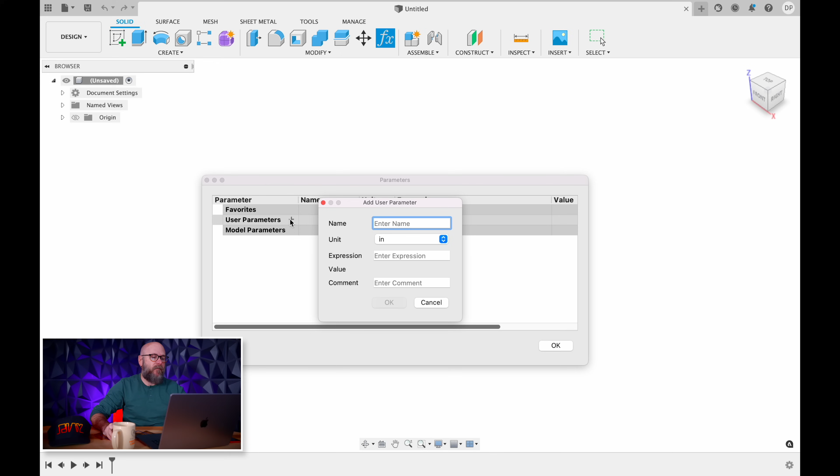So let's bring the computer over here and get started. First thing I want to do here in Fusion 360 is drop some parameters. So we're going to hit our parameter button, and first one we're going to do is width. Let's say we want the width to be 5 inches. We can change this later on.

Hit OK. Then we're going to do another one for height, and for now let's say that is 1 inch. And then we need to do a wall thickness, and let's say that's a 1/2 inch. Again, we can change all of these later if we want to. And then one more for number of sides. That one does not need a unit. And for now we'll say 5.

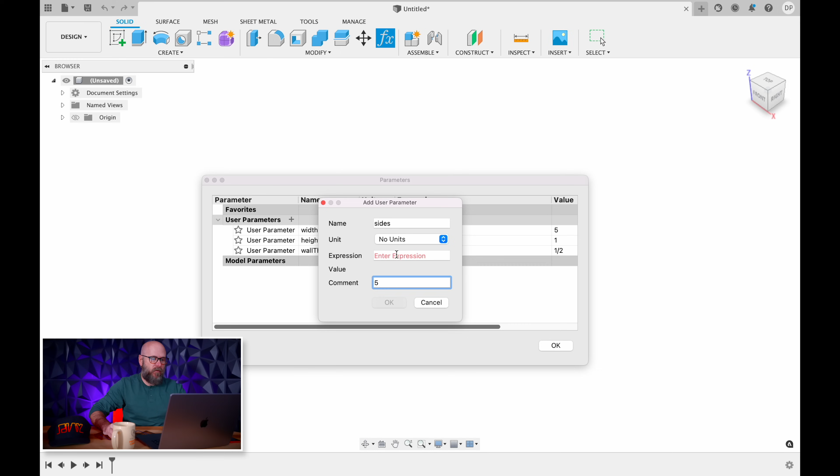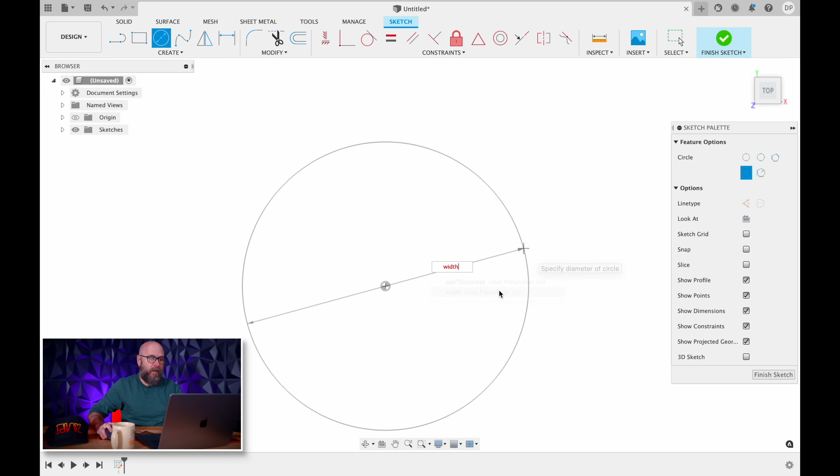Hit OK. Now we need to create a sketch, and we're going to select this plane right here. We're going to create a polygon, and you would think, oh, I would just use the polygon tool here in Fusion 360. The problem with that tool is you can't change the number of sides later down the road. So to get around that, we're actually going to create a circle and just draw a portion of that pie. We'll draw a circle here, and the width is going to be our parameter that we set earlier. So we'll just hit width for that.

And now we need to draw a triangle in that circle. So I'm going to hit L for line, and just any size triangle that you want. And then we'll connect those two lines. Now we'll hit D for dimension. We're going to select this line and this line, and then type in 360, which is the degrees of a circle, divided by the number of sides. We set that variable in our parameters, and that is going to change it to 72 degrees.

I need to extend this triangle out a little bit for our outside wall. So I'm going to hit L for line, come out here, from here to here, and then connect those two. Then I'm going to use the parallel constraint and make these two lines parallel. Then I'll hit D for dimension, select these two, and give that a dimension of wall thickness. There we go. So now we have 1 of 5 sides, and within that I want to create a pocket that we're going to cut out.

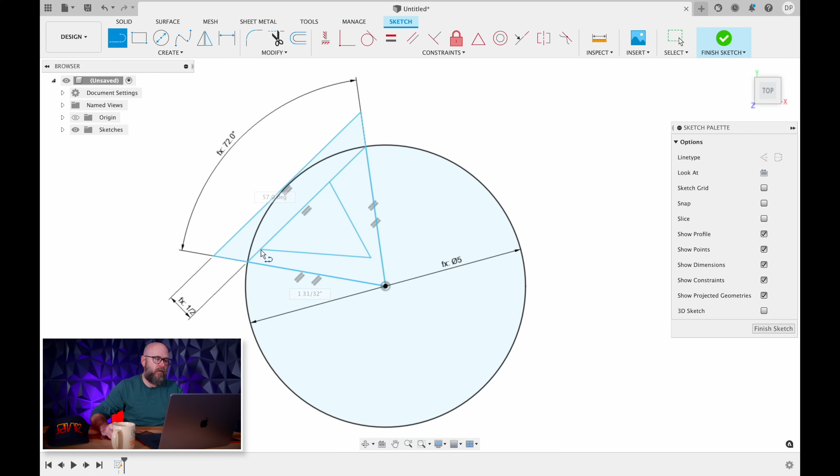So now we're going to draw one more triangle using the line tool, and just randomly pick a couple of points. Then I can use our parallel constraint to make these two lines parallel, and then these two lines parallel, and then hit D for dimension, and dimension those two to wall thickness, but half, so divided by 2. And then again for these two, wall thickness divided by 2.

I want to round over these corners so they are not so sharp, so I'm going to create a fillet between this one and this one, and I want that fillet to be 1/8 of an inch.

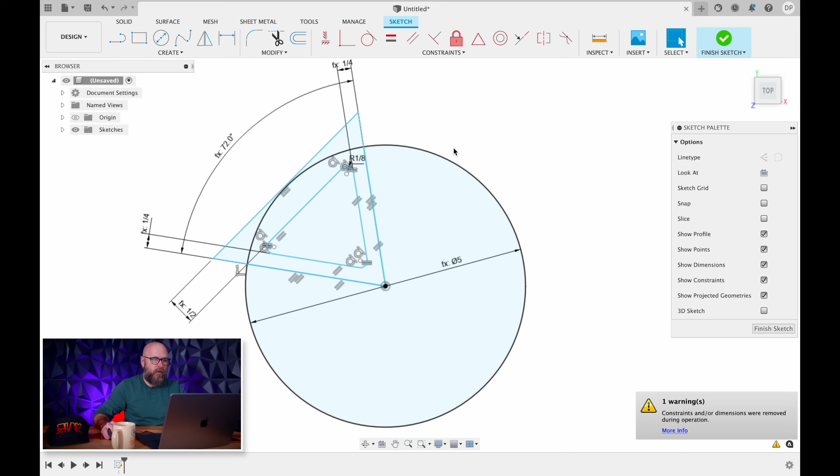Now I'm going to make our circle a construction line, so I'll hit X for that. Everything is connected and looking good.

I want to select this and select this. I'm gonna hit E for extrude, and go down, negative height, and hit enter.

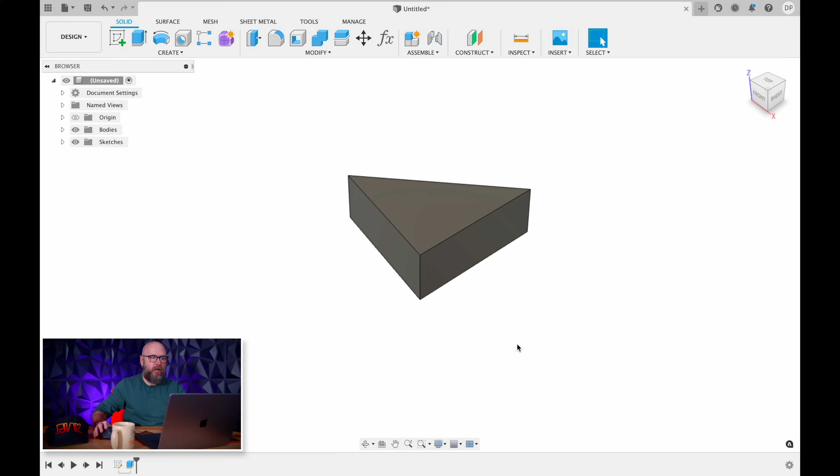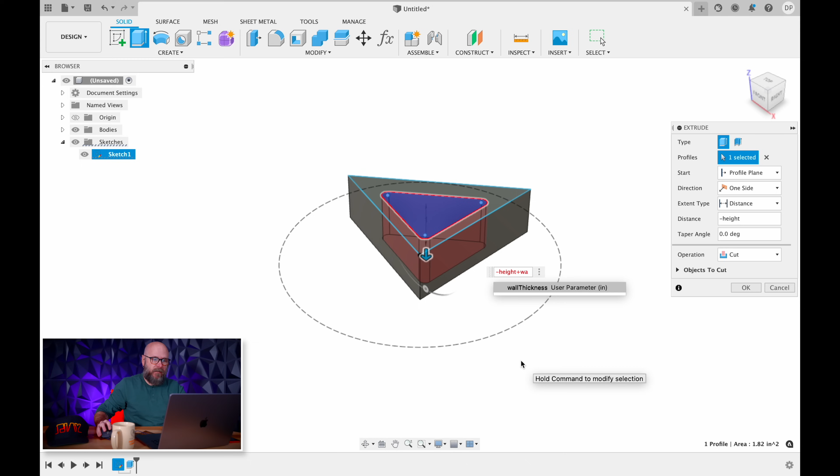There we go. I'm gonna turn this sketch back on so I can see it, select that, and now extrude and pull down, negative height, but that would go all the way through. So I'm gonna add our wall thickness. Click on that, hit OK.

Now I can create a pattern, so I'm gonna go circular pattern, select that body, and have it rotate around that right there. We can choose our number of sides. It defaulted to 5, which is the number we want, but we want to be able to change that in the future.

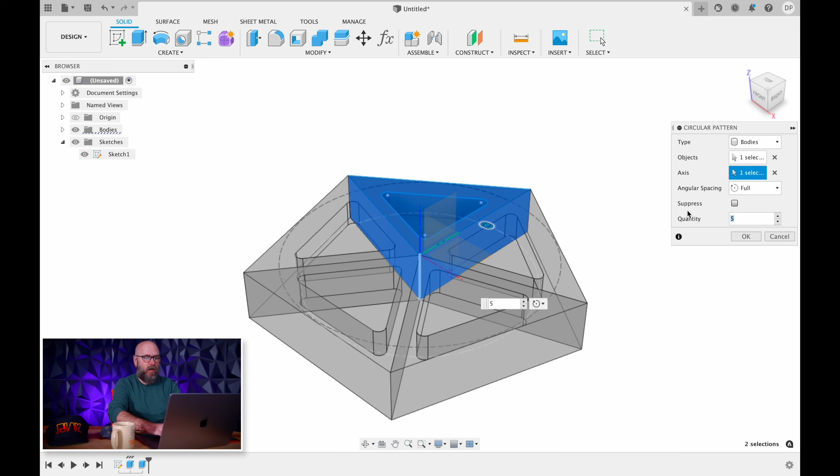So we're going to change that to our parameter of sides. We'll hit OK. This is actually not the number of sides and the size that I want, and this is the really cool thing about Fusion 360.

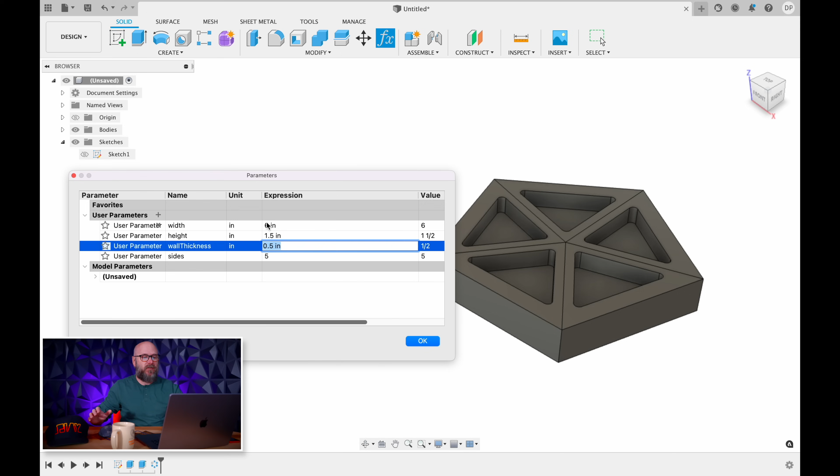If I go back into our parameters here, I want the width to be 6 inches, and it automatically updates that. I want the height to be 1.5 inches, and it updates that too. The wall thickness is too thick, so we're going to go 0.25. That is looking much better.

And we can change this number of sides to anything now. We could make it 12 sides, and look at that, but we actually want it to be 6 sides. There we go.

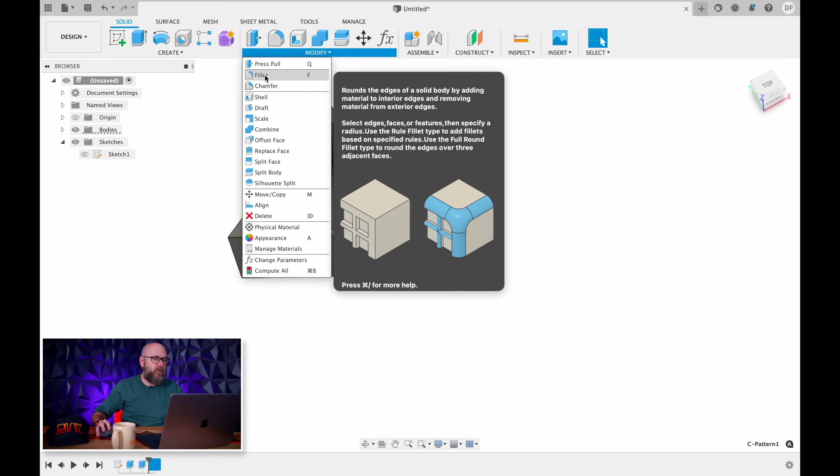This is not ready. There's a couple things I want to change. I want to create a rounded bottom, so if I go back to before I made that pattern, I can choose the fillet tool, select that line, and make it whatever I want. I know I want it to be 0.25.

And then if I move this back over to past where we made a pattern, it updates all of them. I like the wall thickness for the inside, but I don't like the wall thickness for the outside. I want that to be a little bit beefier.

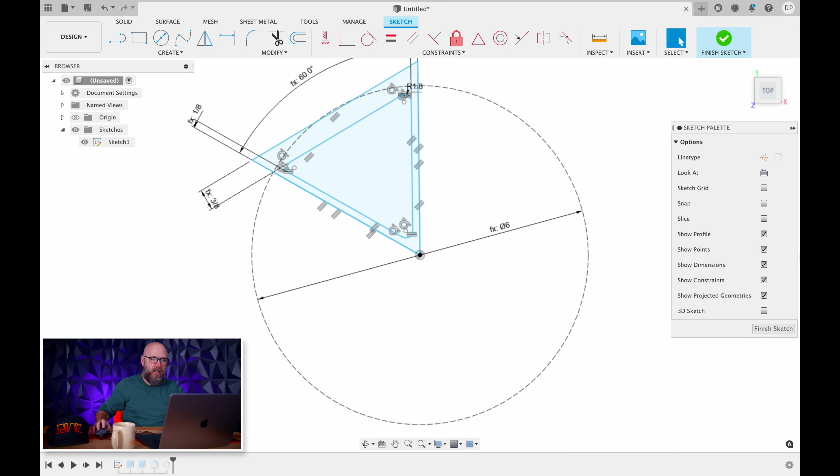So I can go back and edit our sketch, and change this to wall thickness times 1.5, and that updates the sketch. If I hit finish sketch, it updates the whole thing. This is looking much better.

One last thing I need to do is create a lip so it can hold a lid here. I am going to go back to before we created that pattern, and I want to create a sketch on that guy right there.

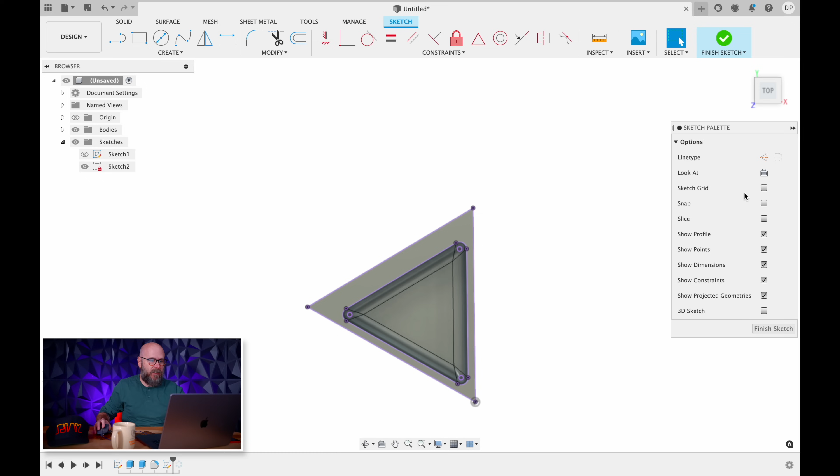Now I need to project all of those lines up onto the sketch as a template here. I'm gonna hit L for line, and draw a line here, draw a line here, and then connect all of that.

I need to make a parallel constraint between this line, and then I'm gonna hit D for dimension, and dimension that to wall thickness times 0.75. I like that.

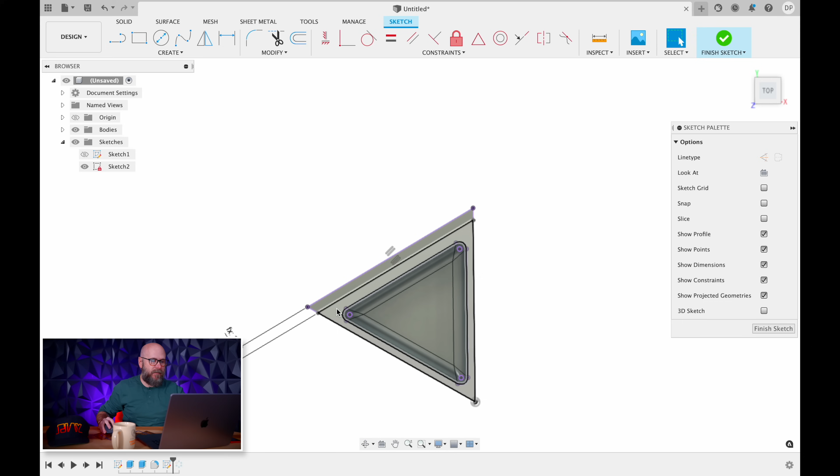So now I'm gonna select this, hit E for extrude, and pull that down so it cuts away 3/16 — whoops, we gotta go negative 3/16. We'll hit OK, and then I can move this playhead to past our pattern, and look at that.

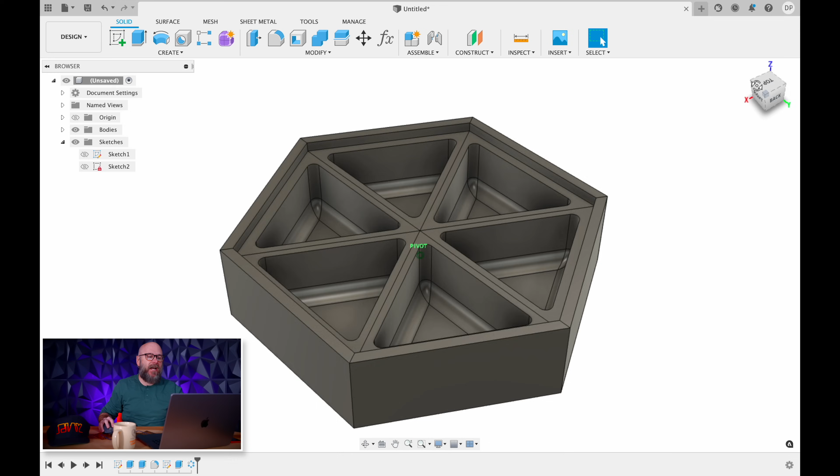That is looking good. I am going to make a lid for this, but we're gonna do that later in the video.

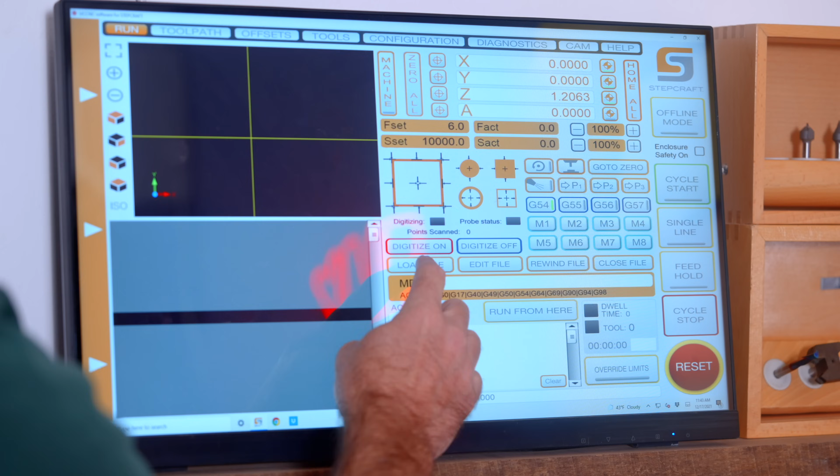So I have my wood milled and cut. I'm making a whole bunch of these — this is what my family is getting for Christmas. I'm only going to cut one at a time, that way I can inspect each one.

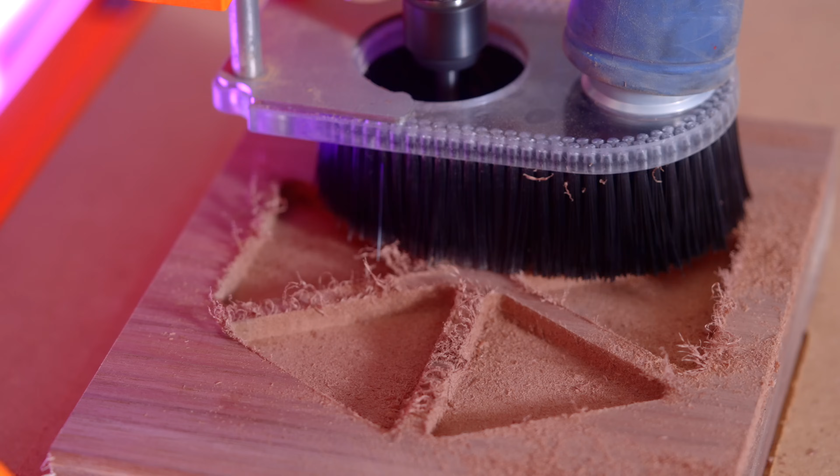This whole operation takes like an hour, and I want to make sure that my end mill is staying cool. If this was only going to take a few minutes for each one, of course I would do this all at one time.

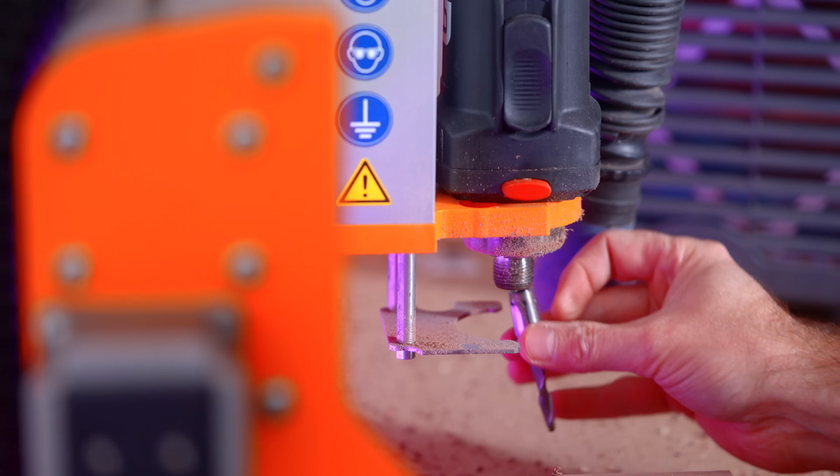So that was all done with a 1/4 inch straight bit, and that left a stair step where that bottom fillet is in the pockets. So now I'm going to do a finishing pass with a ball nose bit that's going to smooth that out. This operation only takes a couple minutes.

So we are back here at the computer and we're going to make the lid. The lid is going to be made out of 2 pieces that are going to get glued together. That first piece is going to fit inside the lid, so let's draw that up. So we have our drawing here.

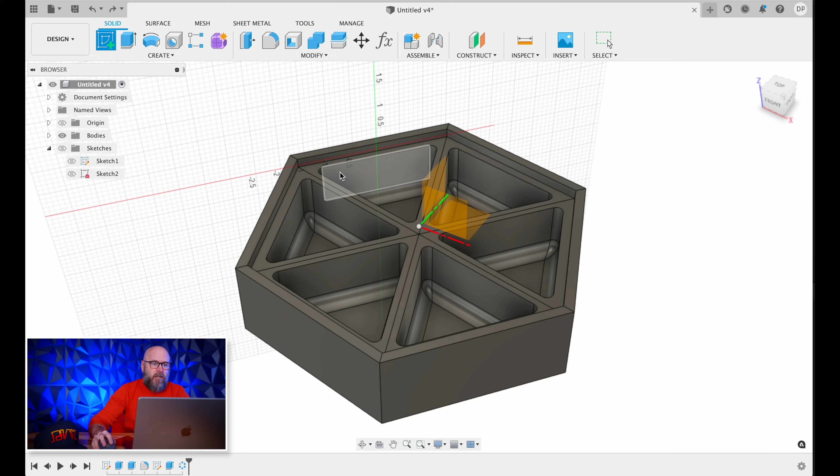Let's create a sketch on this guy right here, and we will project that previous sketch onto this new one. Then I'm going to hit L for line and redraw this triangle, zoom in here, and draw a parallel line from here to here, then dimension these two lines to 3/64.

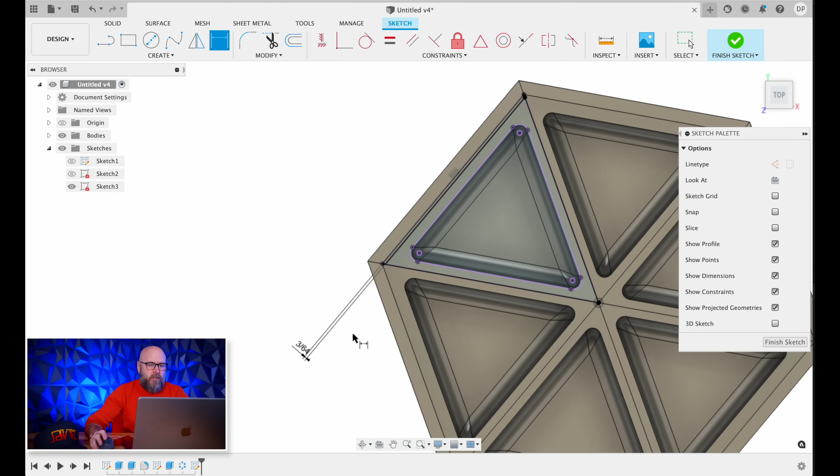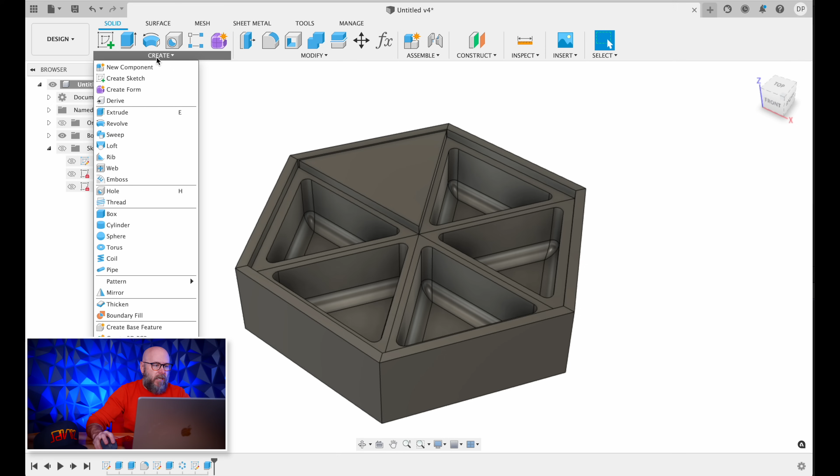I want this to be slightly smaller so there's a little bit of play and the lid will fit in there. So I'll hit escape, select this and this, hit E for extrude, pull that up. I want to change this operation to new body, and pull that up 3/16. Hit OK, and now I want to create a pattern.

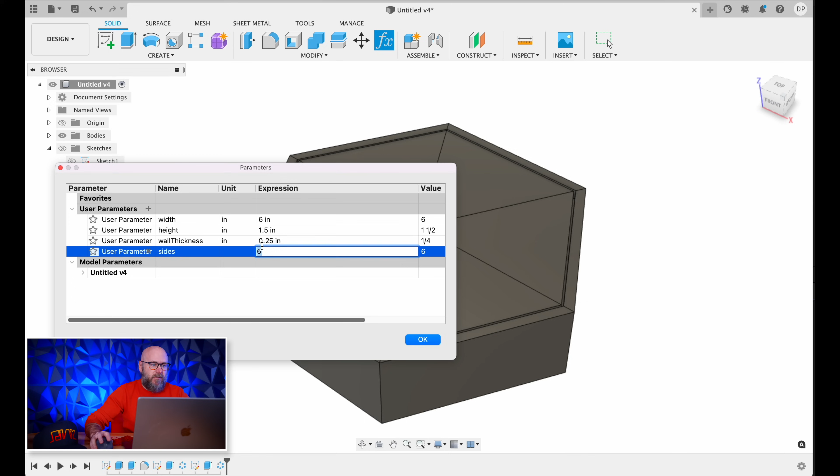I'm going to select that body, and it's going to rotate around that, and we're going to change the quantity to our parameter of sides. We'll hit OK. So that is that piece right there. I should be able to update this, and it updates along with that. So let's change that back to 6.

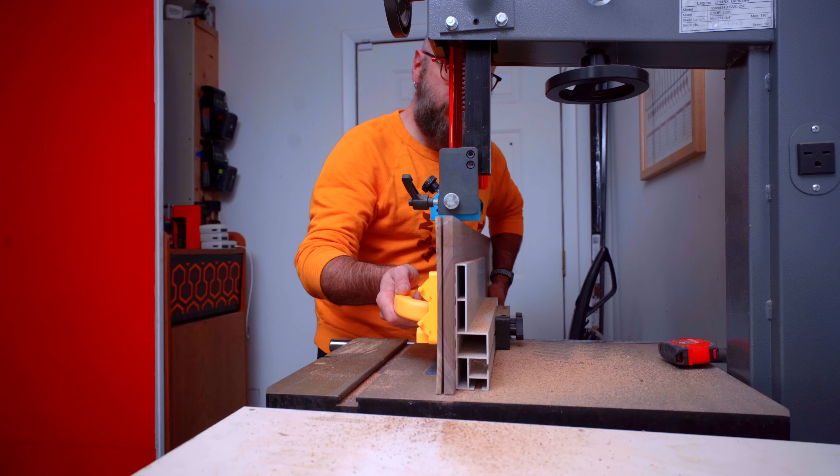I'm gonna go cut that out, and then we're gonna come right back to draw the top portion of this lid. We have the bottom of that lid cut, which fits perfectly into that lip that we cut earlier.

So now we need to make the top part of this lid, which has this really cool texture on there. Not sure if this is showing up on camera. It'll definitely come through a little bit more once we get finished on that.

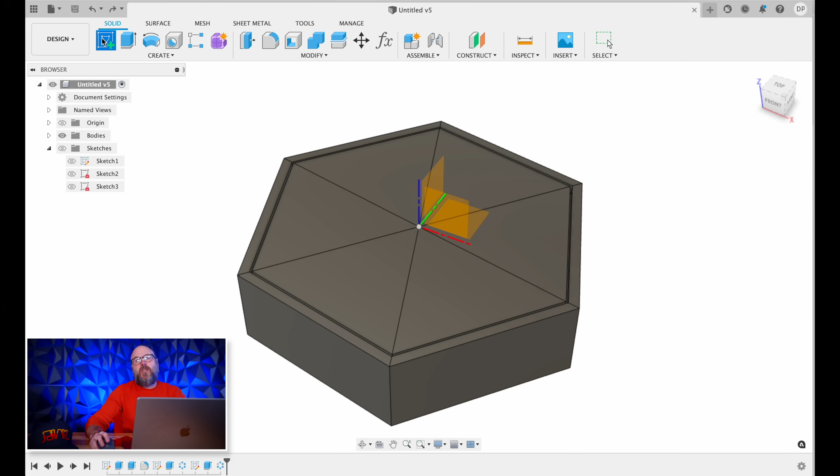So we're gonna create another sketch here on top, and I want to project that triangle there. Hit OK, hit L for line, and we're going to draw one more large triangle. Make sure that is parallel to that, and then we're going to dimension that and that to 0.25.

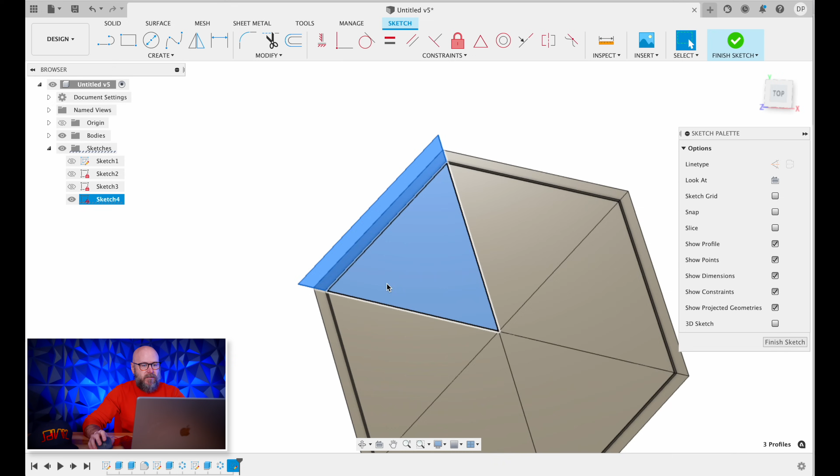This is how far the lid is going to stick out. So now I'll hit escape. I can select all of these, hit extrude, and I'm gonna pull up, and I don't wanna join. I wanna create a new body here, and I'm gonna go up 3/16.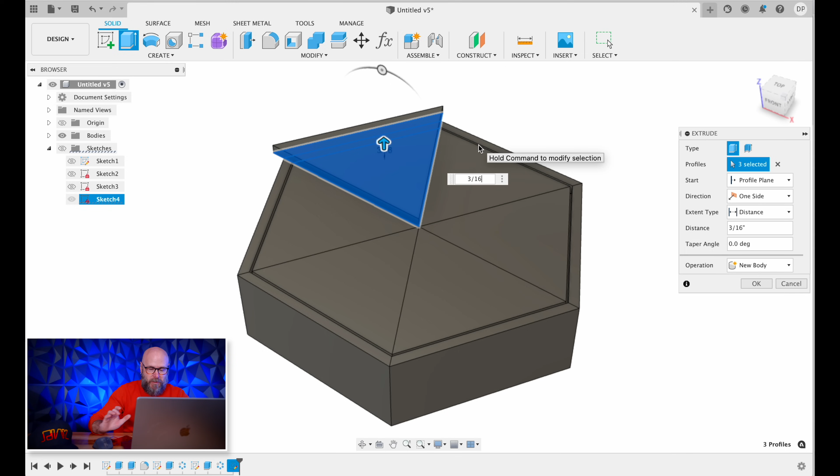Low battery, get out of here with that. So we're gonna go 3/16. Now we're on a time limit. Hit OK. Now I'm going to draw one more sketch on top of that.

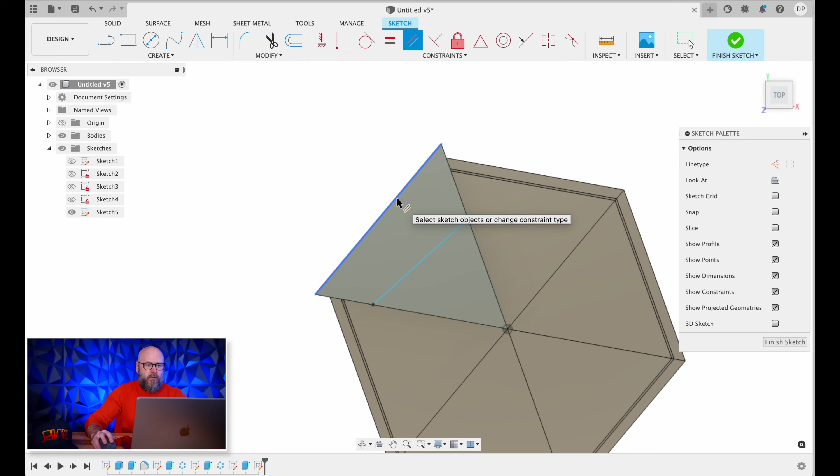And this is just purely decorative. It doesn't really matter where it goes, but I do want that line parallel with that. So we'll select these two. There we go. I'm gonna hit finish sketch, and then turn the visibility of that sketch on.

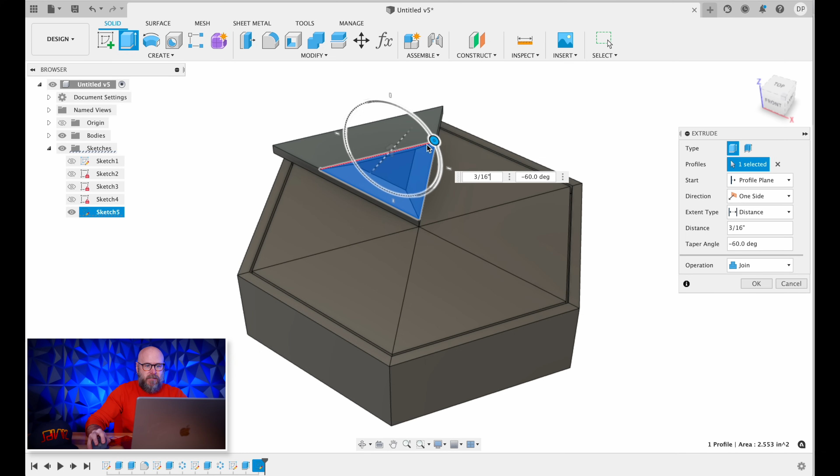I'm gonna select that right there, hit E for extrude, and pull up another 3/16. Then I'm going to turn this 80 degrees. Hit OK, it's okay to join.

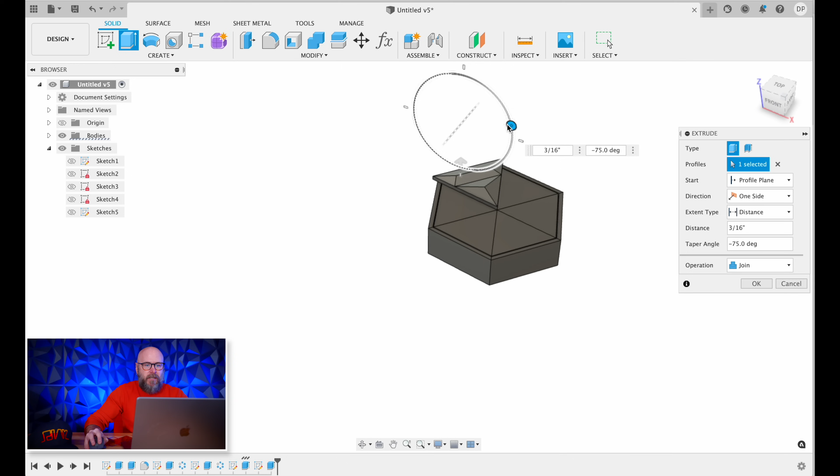And then that right there, I'm gonna do the same thing. Gonna pull up 3/16. And where's my little way out here? And we're gonna go 80 degrees. We'll hit OK. Zoom back in here.

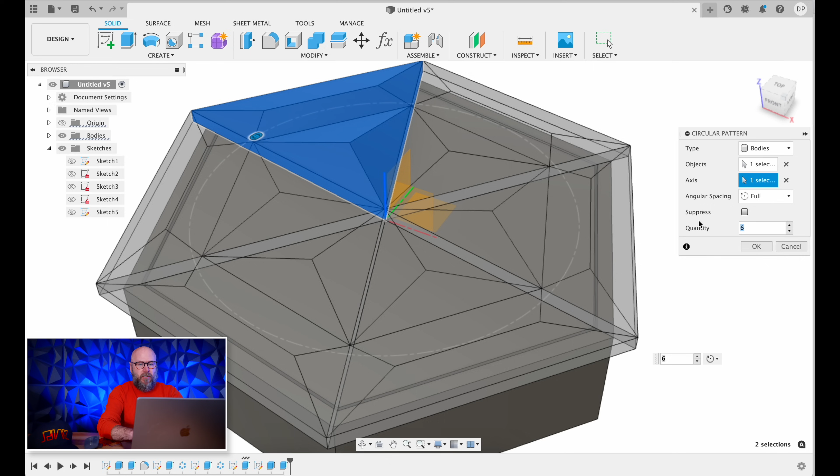And then once again, we're gonna create a pattern, that body right there, and it's going to rotate around that right there. Quantity, we're gonna go back to our parameter of sides, hit OK. That is our box right there. Let's go cut this out on the CNC and start assembling everything.

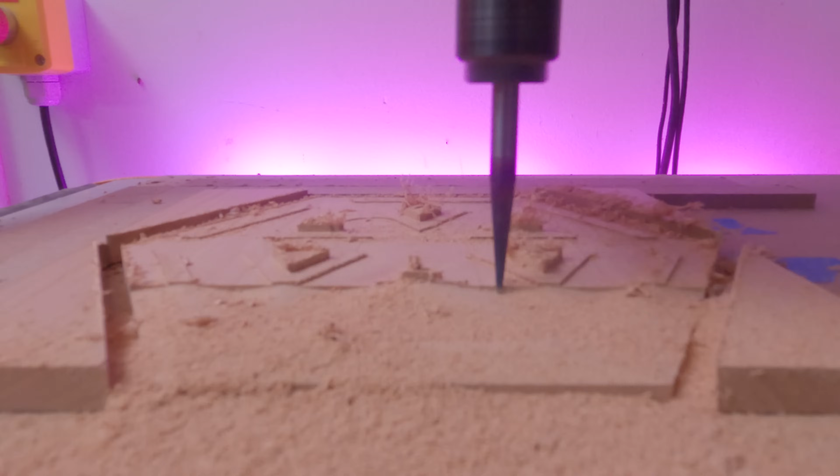I greatly underestimated how long it would take to make 13 of these candy dishes. I didn't mill up all the wood at the same time, so that took a lot longer. And then the tool bit changes on the Stepcraft, going from the straight end mill to the ball nose, back to the straight end mill to the tapered finishing bit, and then moving on to the next box, took a lot of time. Of course, I could get a tool changer for the Stepcraft. Maybe someday I will. I don't know how much I would use it since I don't do a lot of projects like this, but we'll see.

And then I put a chamfer along the bottom of everything over at the router table. And then, oh my goodness, the sanding took forever. And basically, I ran out of time. I had to tell myself to give up, let go. And my family members are going to love this no matter how well or not well they are sanded. It was just one of those situations where I had to say, don't let perfection get in the way of progress. So normally I have very high sanding standards, but you can see some of the machine marks in there and on the inside. But I ran out of time. What can you do? Still made with love, but it just took forever.